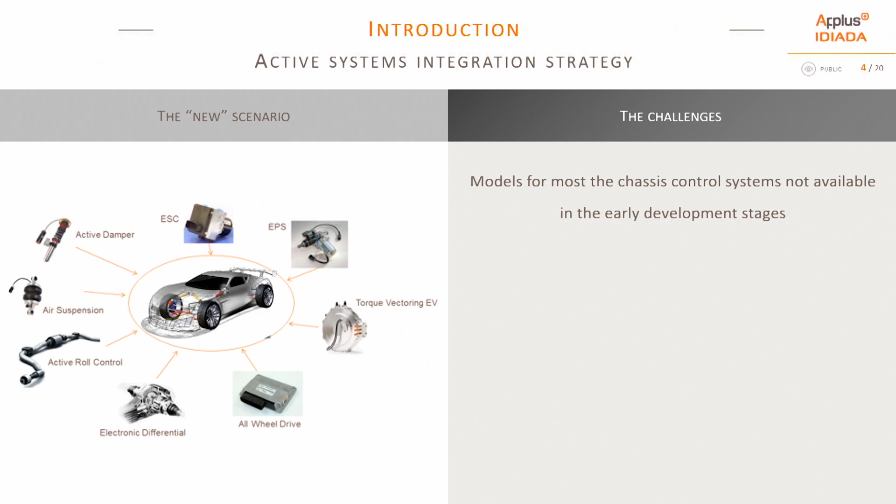Okay, that's enough for the introduction, so I'd like to go now through the presentation of today, which is about one issue that we have in today's industry. It's not an issue, it's actually a big opportunity, but also sets some challenges for us. So it's the fact that vehicles have an increasing number of electronic chassis control systems, and we have sort of a headache trying to integrate all these systems together, and also within the passive chassis components. So this challenge is made even bigger by the fact that very often when we start developing a new vehicle or a new vehicle platform, we miss models of these systems. So we don't have the information from the suppliers in order to integrate these systems in the early stages.

And so this means that it's quite difficult to plan a comprehensive strategy for target cascading where we can allocate specific performance components to the passive chassis, the kinematics, the compliance, taking into account that the vehicle will actually have a number of different electronic chassis control systems. And there is also another limitation, which is the fact that if we are missing these systems, we are also missing them for digital twins.

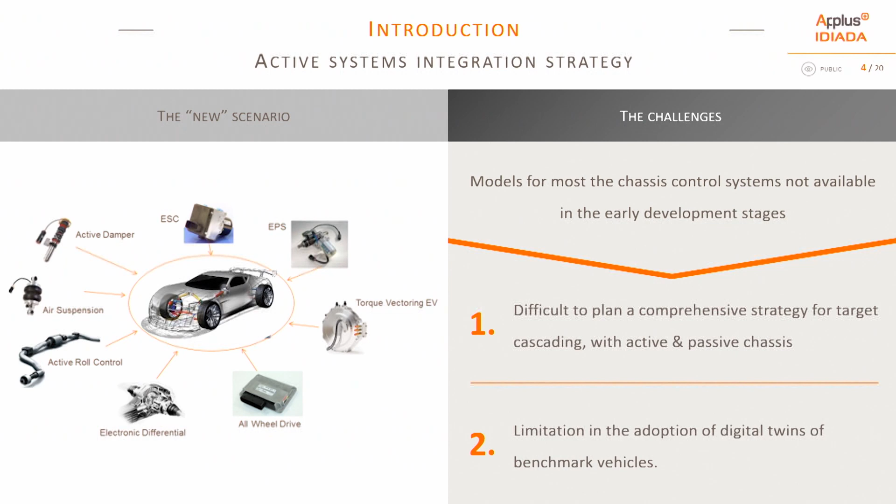What is a digital twin? So nowadays, we work on the simulators, similarly to what we used to do and what we're still doing in the proving ground. And when we are doing development, we always want to have a reference car to compare and to understand where is the gap versus our best competition. So a digital twin represents exactly this benchmark, but translated into the virtual environment and especially in the driving simulator. Of course, if the vehicle model that we are generating of the benchmark vehicle will have certain active systems, we need to have those systems integrated in the digital twin.

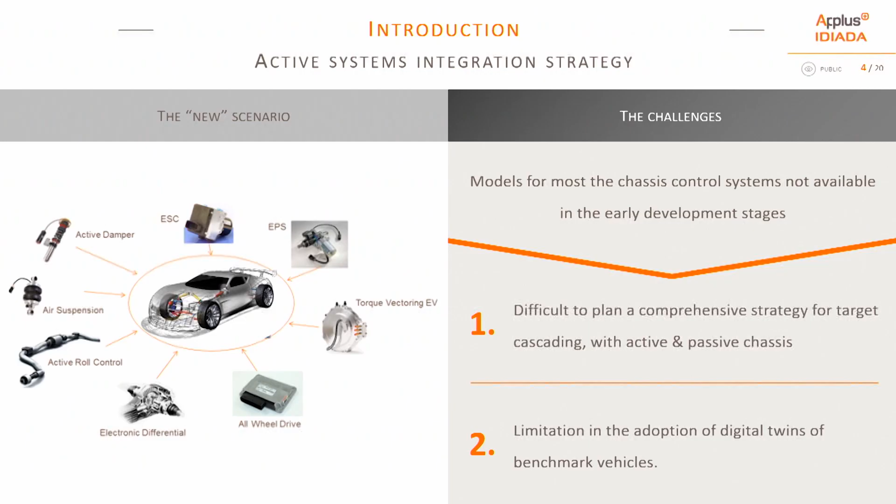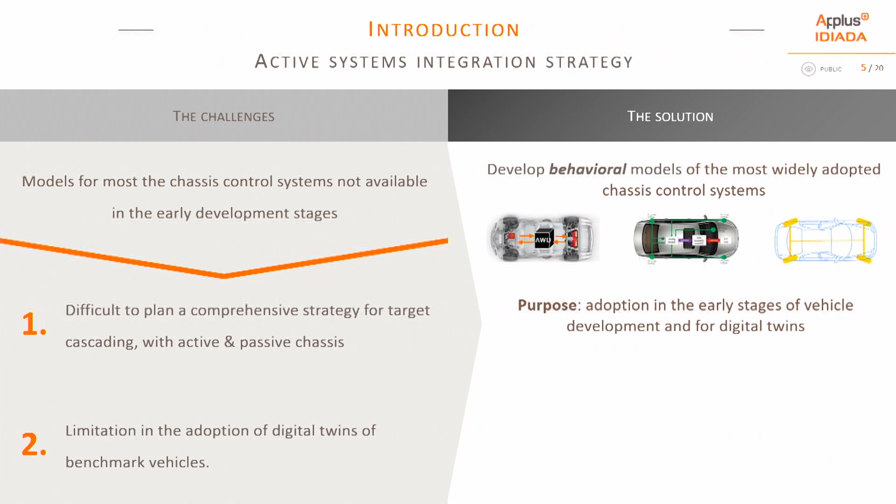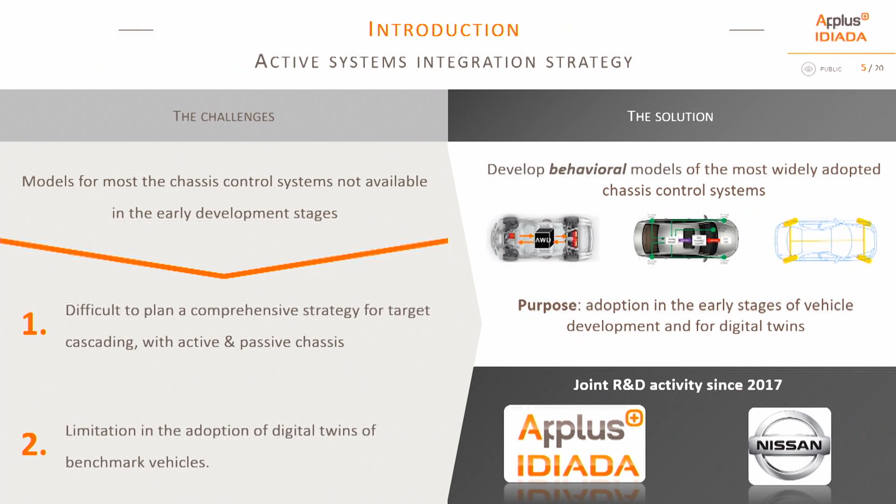So the solution we have been working on in the last years with a number of customers is to develop what we call behavioral models, which means a library of models of the most widely adopted chassis control systems with the purpose of having them available for early stage development and for digital twins. And the company we have been working the most in this domain is Nissan, with which we started to collaborate in this domain in 2017, and we have elaborated a number of different projects with them in this area. And today's project is exactly about this sort of process.

So I'm going to present the latest study we have done together in which we had 3 different main objectives. So one objective was to develop a digital twin of a benchmark vehicle that could be used as a reference in the driving simulator. The second objective was to generate a rear wheel steering logic that would be representative of the actual behavior of the rear wheel steering installed in the benchmark car. And the third is to have the possibility to make this logic very tunable so that we can then use it in the early stages of development for new programs, and we can have different sort of behaviors out of it.

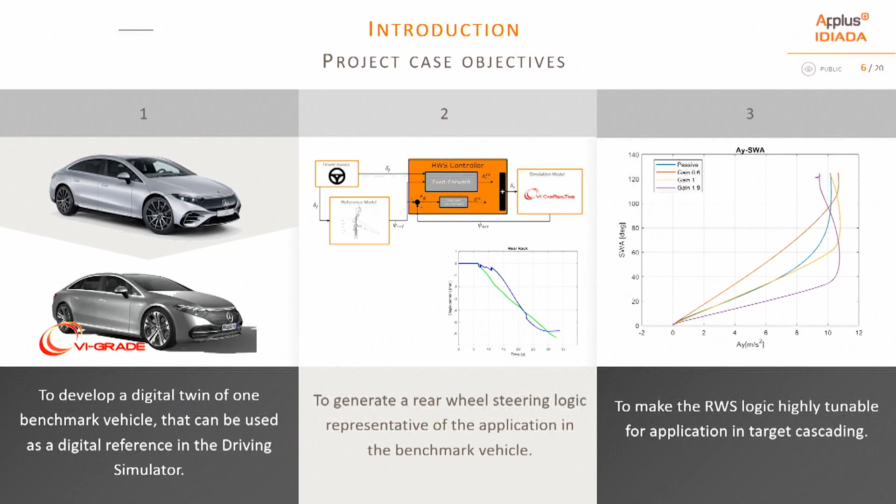So the activities we have gone through in the project are the testing, extensive testing of this benchmark vehicle, then the generation of a passive model and the generation of an initial concept of the logic of the control rear wheel steering, and then the integration on the driving simulator.

So the outcome of this activity is the fact that we have enough data for model building and model validation. We have a model of the passive vehicle with the integrated rear wheel steering, and in the driving simulator we will go through a complete validation of the model, both at objective level and at subjective level.

Okay, so let's go through the process of model generation and validation. So typically when we want to generate a digital twin of a specific vehicle, we need to do a lot of testing. So luckily in IDIADA we have all the facilities to generate enough data to supply all the different parameters that we need to input in the model. And this is a relatively straightforward and well-established process when it's the passive vehicle models.

So typically we will generate tire models using, in our case, a tire trailer. Then we will have testing done on the K&C rig to generate the multidimensional suspension mapping and also obtain properties of components such as the bump stops, the springs, the anti-roll bars, etc. Then with full vehicle testing, we will generate simplified data for the powertrain and for the brakes, and also for the aerodynamics, where we combine this data with some, let's say, reference for the kind of vehicle category.

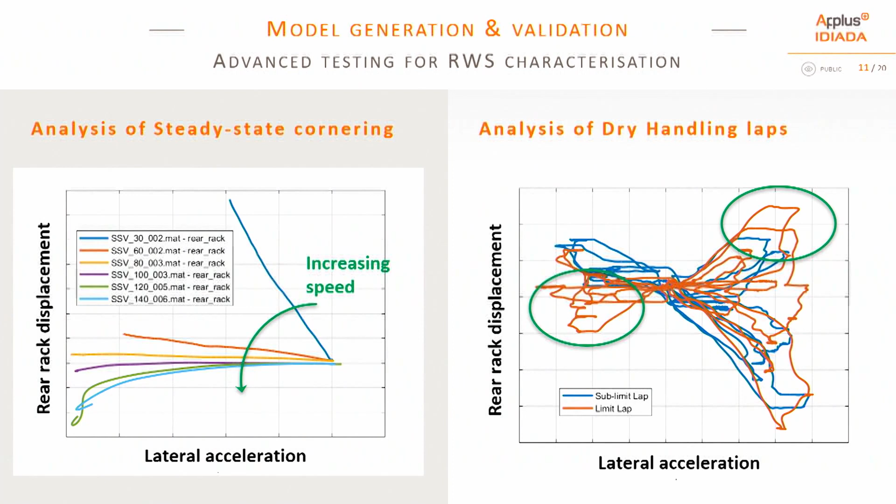And whenever we need to adjust the model or adjust the tuning parameters of the correlation, we'll do that until we get enough correlation for all the offline maneuvers. And then we will also run sessions at the DIM with expert drivers who have driven the real car until we get a behavior which also subjectively feels the same, because there are many points, of course, that cannot be measured completely with the offline maneuvers.

So the variation and the kind of style of driving can influence, and we want to cover all these aspects as well. And again, in this driving simulator session, we may tune again and modify the logic until the point when we are quite happy with the model and we consider it correlated.

So specifically, the rear wheel steering logic that we generated is relatively simple in the sense that it captures the typical behavior and the typical objectives of a rear wheel steering. So it enhances agility at low speed and enhances stability at higher speed. But it's also a little bit more complicated than this, because depending on how the driver is driving, it's not only based on speed, it's based on a number of other different factors.

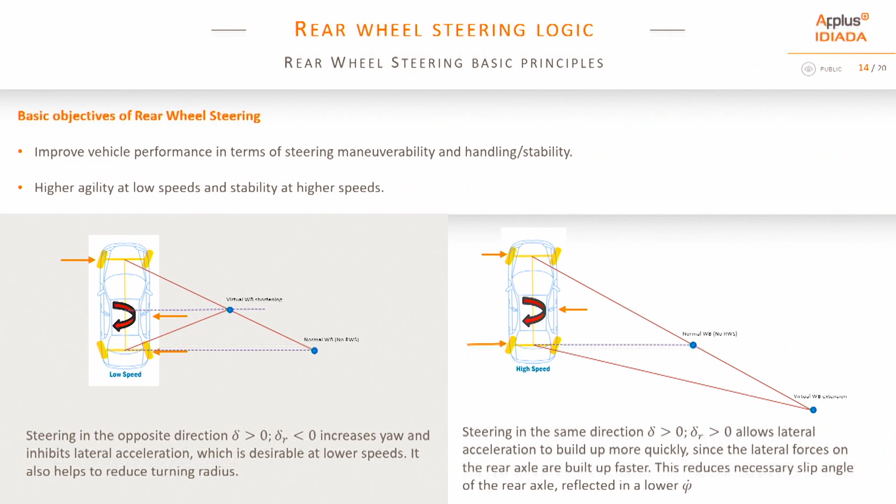So finally, the logic that we have developed is mostly based on two components. We have a feed-forward controller, which will operate based on a yaw rate reference and on an inverse model of the vehicle, and we have a feedback component. And based on the different applications and based on the vehicle we are trying to match, we will activate and tune the logic and maybe deactivate certain parts of it.

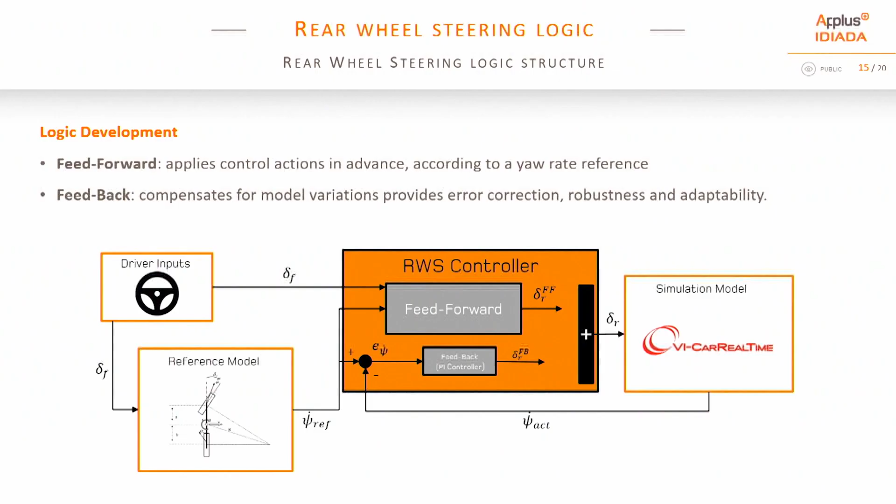The logic also has a wide range of tuning parameters that we can use in order to modify its actuation. So we can operate mostly on the yaw rate reference gain, on the yaw rate reference in terms of the linear range of the yaw rate generator, and also, of course, on the parameters of the feedback controller.

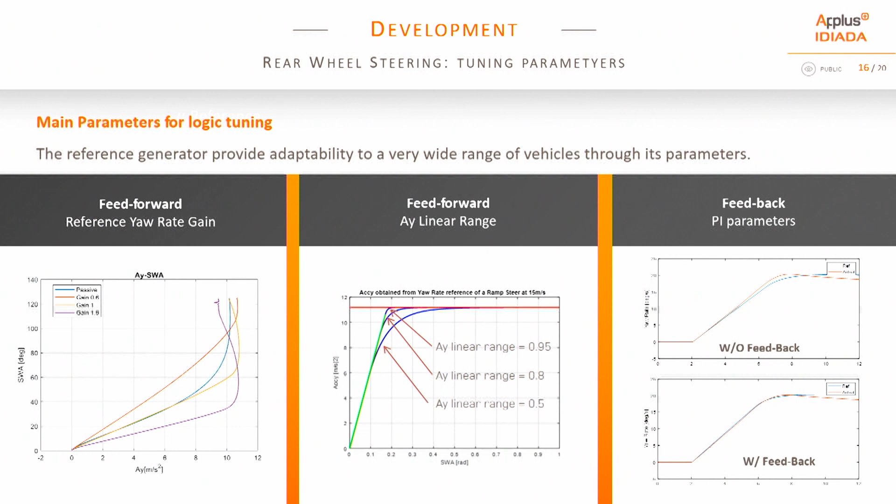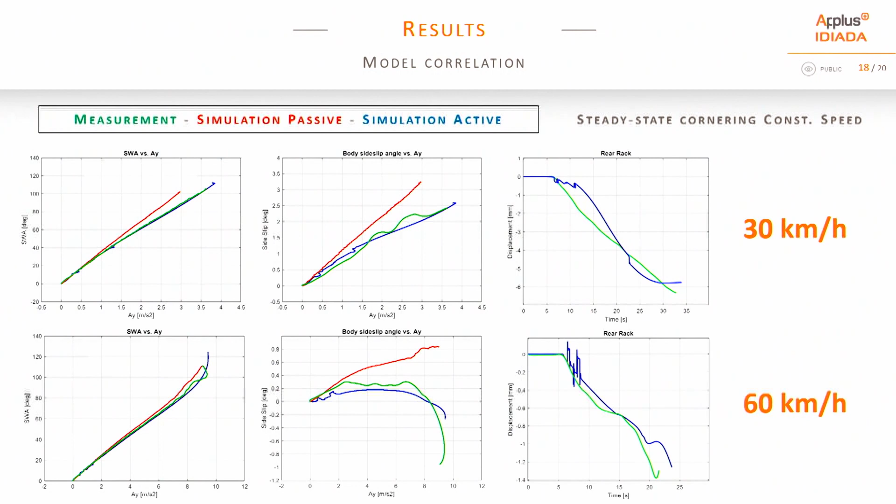So this is how we typically would validate such a model in order to make it available for, as we said, benchmarking in the driving simulator, but also as a starting point logic for new development. So the conclusions: at the end of the project, we were able to have a complete digital twin of the competitor, which also included the rear wheel steering logic, and this logic has been already applied both for benchmarking and for early stage development of new Nissan products.

The next step that we are following: this is an activity that we have been working on for several years. So this was one example, and we keep expanding the library of active chassis control systems, because one main interest for us is to be able to actually combine many of them together and study strategies to integrate them better with integrated chassis control logics, etc.

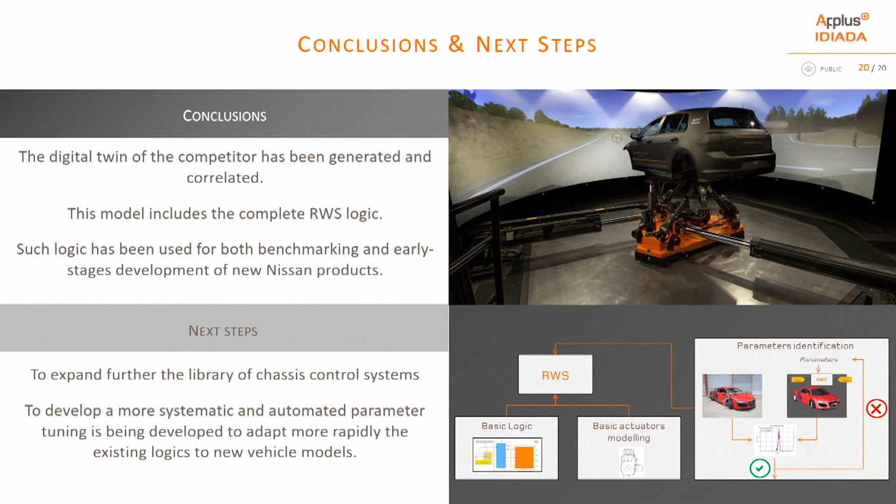And what we're also working on is to develop a very systematic and almost automated parameter tuning, so that from the test data with an existing logic we can more effectively and more efficiently adapt the logic to the specific target vehicle, and that is especially interesting for the digital twin model case. Okay, so thanks. This is the end of my presentation.